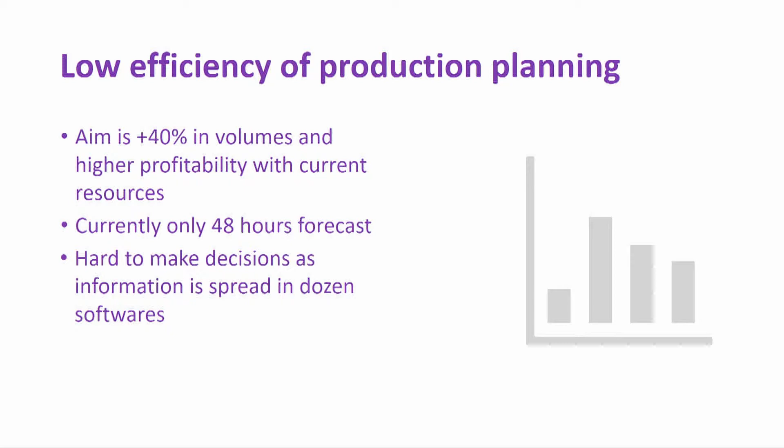As I said, it's finally all about efficiency. The questions are: how to grow and get more volumes and better profitability using our current resources, equipment and employees? Do we really know how efficient we are using our current equipment, and how efficiently our people are working? Do we know what can be done in a completely different or much more efficient way?

We found out that today we do not have a very clear picture. Yes, we are using ERP and several other programs for planning and production preparation, but still we do not see the big picture clearly.

Especially the preparation time before production is too long and time-consuming. All information is spread across different programs and several places, and this makes decision-making for managers complicated. Again, production planning should be much more efficient with a much longer view than today, as today's ERP just gives you a forecast for the next 48 hours, but this is not enough.

As you know, today we always have a question about labor. It is hard to find qualified people, and how do we keep today's employees motivated so that they don't leave for another company or our competitor? How to motivate the best people? Are we sure we know exactly who are the best?

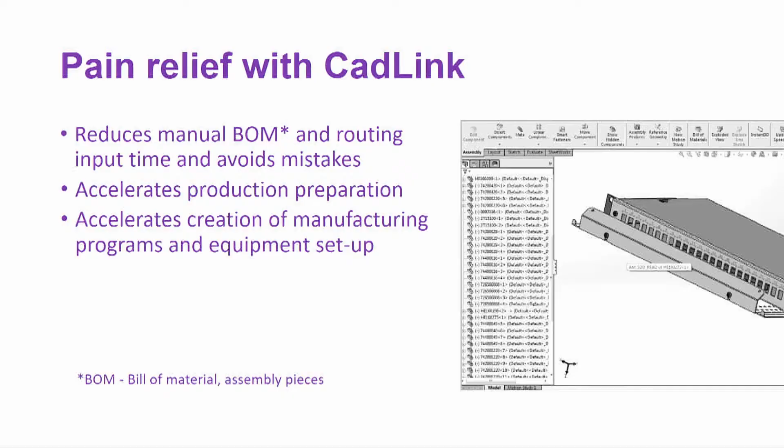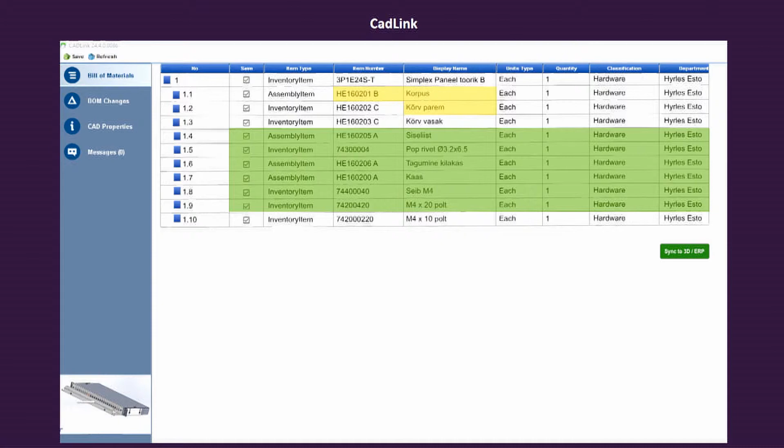But the magnificent part of this is that this small plugin can increase preparation efficiency up to 80%. I think that's really fantastic. Just sync to ERP and to financial software, there it goes.

Next up, I'm going to talk about how Ganttplan reduces this kind of planning and the long view of production planning. First of all, it improves production accuracy. It gives a longer than 48 hours view to the future, which is right now for Hyrles. So they want to see the view like few weeks ahead or even more.

For example, if some kind of smaller order comes in and has been queued for later, the software helps automatically plan all combinations of manufacturing and get this small piece done when a resource is accidentally available. And of course better utilization of current resources with that automatic production planning - you give a robot permission to plan the production all the time, whatever happens. If a machine breaks down, there's unscheduled maintenance, or material is late, the software production planning is on autopilot.

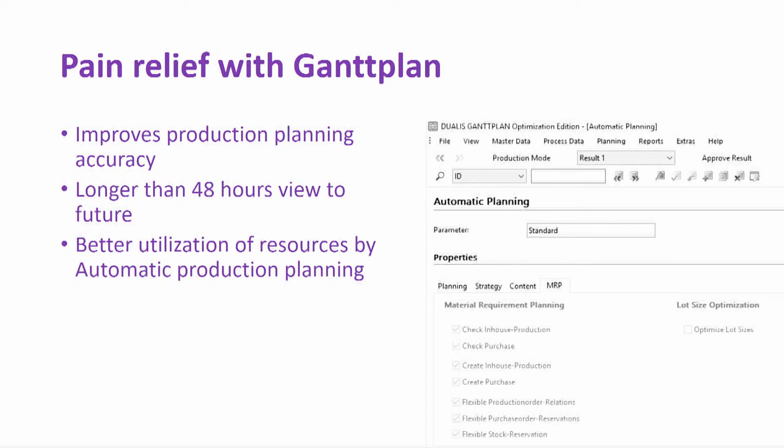This is a quick view of the Ganttplan. It gives a visual overview of what has been done and is planned in each work center, and of course bill of material and routings as well.

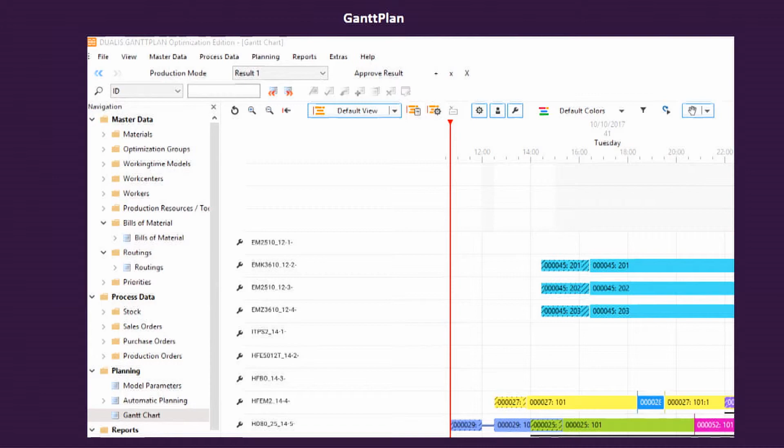Next up, Real-Time Factory. Real-Time Factory helps Hyrles solve the pain with overall equipment efficiency. It measures overall equipment efficiency to have situation awareness on equipment utilization, and at the same time real-time situation of who does where and what. Also production planning with Real-Time Factory at the equipment level - so you can do production planning at the equipment level.

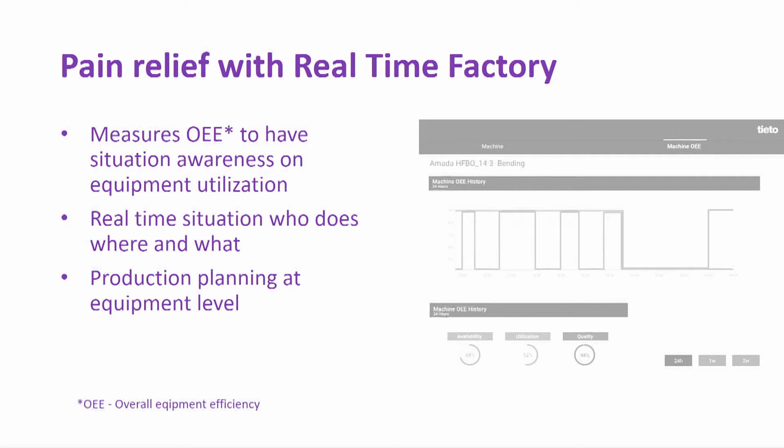Here's a quick view of Real-Time Factory. The 3D drawing of Hyrles' factory was made in this software, and you can see factory overall efficiency and factory overview, or machines' overall efficiency, machines overview, etc. But when you combine Real-Time Factory and Ganttplan production planning together, they give a really unique value point, which boosts better planning, which of course gives better profitability for manufacturing.

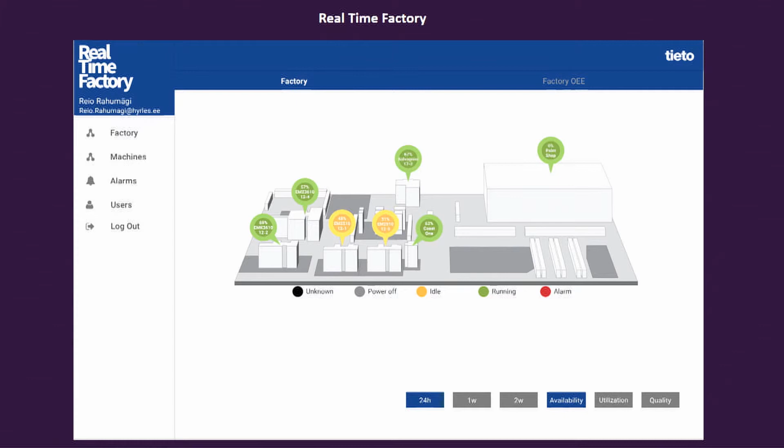So to summarize these three solutions, I will show a small video to you, and let's roll.

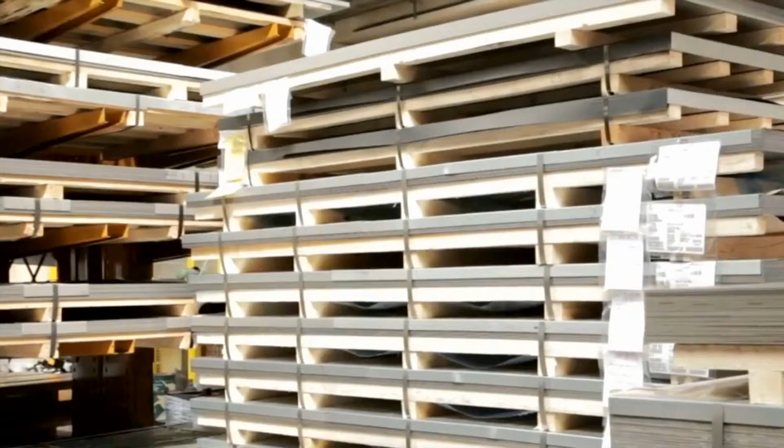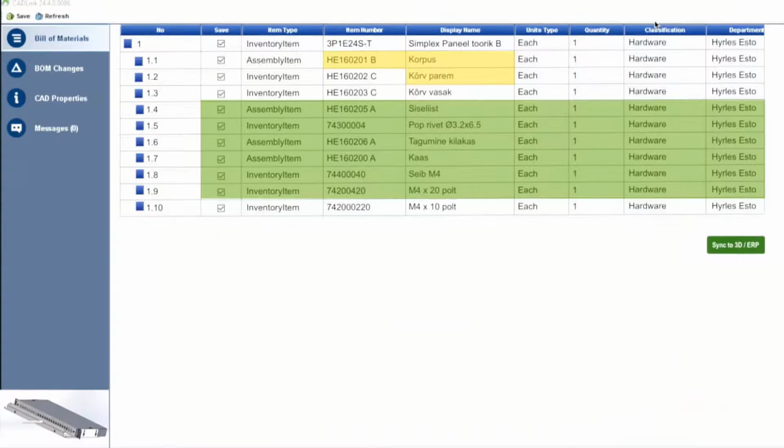This is the material that needs to become a product. But this is a factory. The material enters the factory. A 3D drawing of the product is made. The list of details and manufacturing process routing are synchronized with financial ERP software by the CadLink plugin. Kanban software automatically plans production, and the production plan is updated in real time. Real-Time Factory software gives an overview of who does what and where during production. The material becomes a product on time, and machines are well loaded. Better planning, better profitability with the Estonian Industry 4.0 solution.

Next, I'm going to talk about the human journey in manufacturing. So you saw the material part, now let's look at the human part. Operator interface is a solution that adds situation awareness to manufacturing software for employees. We call it employee experience.

First of all, it increases efficiency and reduces work and time losses, so people don't have to run across the factory to talk to the shop floor manager or production manager to synchronize information. Everything is done at the workstation, on a tablet interface. It makes work time counting more transparent, so employees who worry that their work time is correctly marked and counted, because it's their salary, can be reassured.

It also enables building dream teams, combining best performers as ninja teams in the factory. Here's a quick overview: with the continue button you can continue your production work, pause it, or view the manual. But the most important thing is that it gives a first step to a paperless factory, so you don't have papers at the workstations.

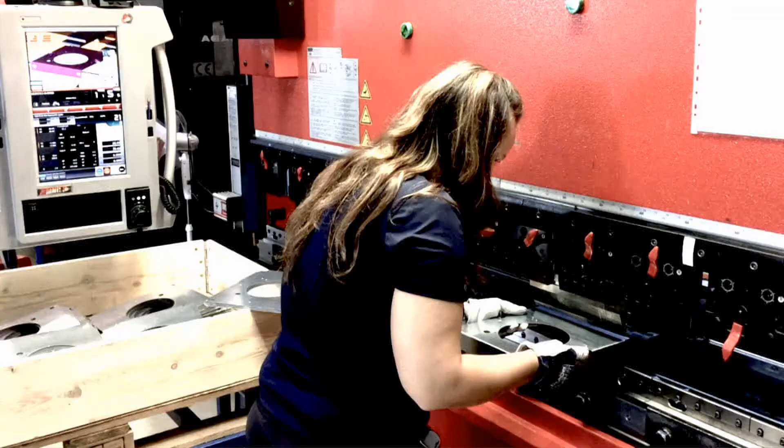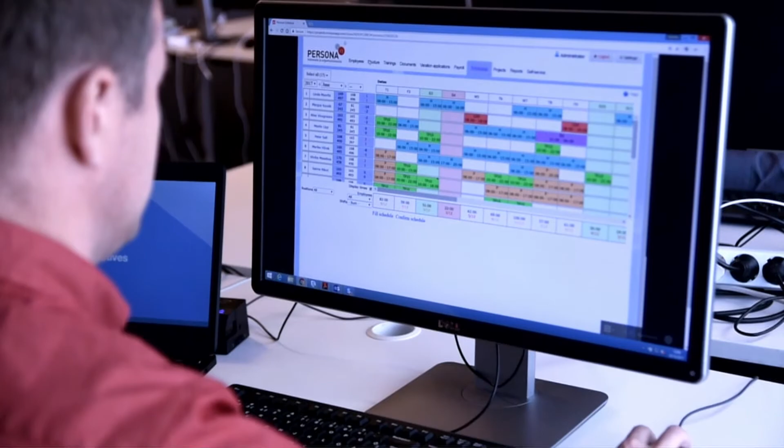This is Ave. She starts working with the machine in the factory. She checks her tasks in the operator interface and starts working. Ave's access rights and personal data are managed by the Persona software. This is Gunnar, the production manager. He creates Ave's work schedule in the Persona software. The Kanban software automatically plans production, and the production plan is updated in real time.

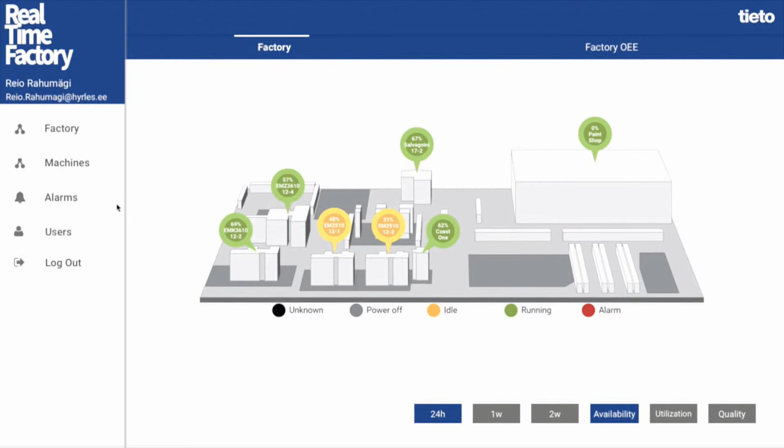Ave finishes the production orders. The production manager has a real-time overview of this. Overtime and associated costs are then decreased by better planning. Better planning, better profitability with Estonian Industry 4.0 solution.

To conclude, first of all, the business value of the integrated systems for Hyrles is that they get increased customer loyalty, as they can forecast further with more transparent production plans which they can share with partners and customers, volume and efficiency growth by utilizing current resources better, and also reduction of waste and time losses. But this is only the first step in digitalization, as digitalization is basic hygiene right now for manufacturing.

Do you agree? Yes, absolutely. And on top of hygiene, you can build innovation like big data, artificial intelligence, and trouble prevention in manufacturing. If you can forecast, then you can react to trouble or provide some other experience. So better planning, better profitability. Thank you.

Okay, so if I can just maybe quickly put one or two questions to you. Urmo, you have the factory in the sheet metal processing business, and Andres, Tieto Estonia is a software business. So how did the process of communication begin for you to tell Andres what your issues were and what you may need in terms of software, and for Andres to identify what might work for you?